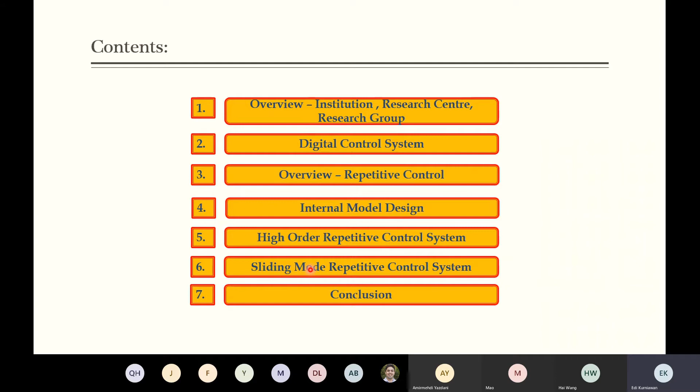My presentation material is composed of: first, a brief overview about my institution, research center and research group; then a short introduction about digital control systems, because most design is done in discrete time; then I'll explain repetitive control, and the internal model design; then I'll cover a certain type of repetitive control called high-order repetitive control systems; and number 6, I'll discuss how to integrate repetitive control and sliding mode control system to get better performance; and then I'll close with conclusions.

This is my institution, named Indonesian Institute of Science. The official name is actually LIPI, so it's not IIS, it's LIPI. And the headquarters is based in Jakarta.

This Indonesian Institute of Science has 25 research centers, 4 administrative bureaus, 4 botanical gardens, so we have botanical gardens as well, and there are almost 1,600 researchers. The 25 research centers are located in 11 provinces, so it's not all centralized in Jakarta, but spread across 11 provinces in Indonesia.

This Indonesian Institute of Science is the largest research institution in Indonesia, and it's also a government research institution. It was established in 1967, and it's also rooted from the colonial era in 1817 with the establishment of the Center for Plant Conservation, and we are a leading patent contributor in Indonesia. That's about the Indonesian Institute of Science.

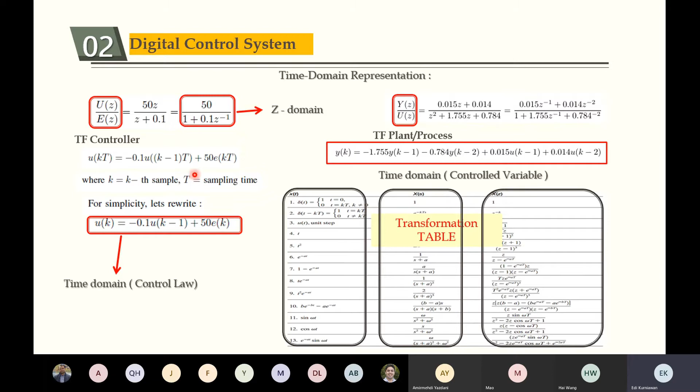Next, we go to repetitive control. I would like to introduce repetitive control. I think it's already well established since 1970.

Repetitive control is basically a learning control scheme, but this learning control scheme is different from a neural network or AI. This learning control system is based on using the previous value, one period value, and this RC is powerful for perfect reference tracking and also good disturbance rejection. The requirement is that the reference and disturbance has to be a periodic signal.

The application for RC can be used for robot control - for instance, for a pick and place robot doing repetitive tasks, picking and placing repetitively - and also used for hard drives in industrial machinery to remove vibrational disturbance.

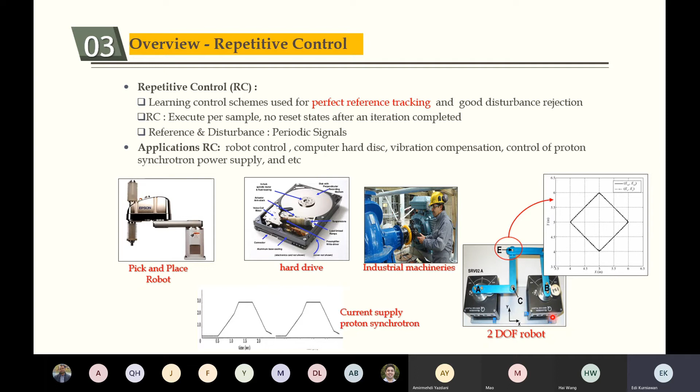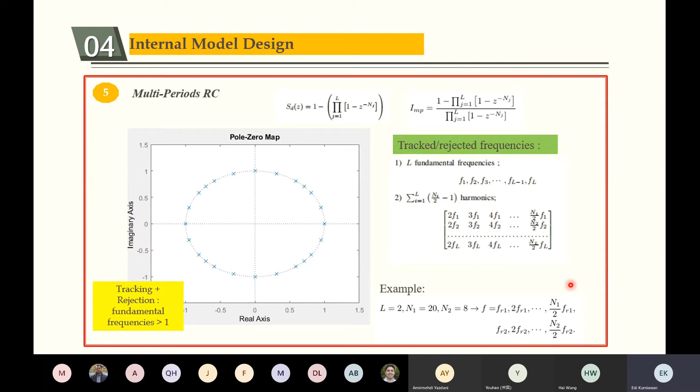Next is multi-period RC. So we are trying, let's say, tracking and rejection at the same time, but it has more than one fundamental frequency. For instance, I would like to track 1 Hz and also reject a disturbance at 1.5 Hz, then we need to use multi-period repetitive control. So here, for example, we have two fundamental frequencies, and we can reject the first fundamental frequency and its harmonics, and also reject the second fundamental frequency and its harmonics. That's for multi-period RC.

However, what if the period of the reference or disturbance is varying or changing? So it's not exactly what we knew before. Can the generic, modified, odd harmonics, low order, or multi-period RC handle that? The answer is no. When we have this kind of variation, the number of samples per period will vary as well. This variation affects the tracking accuracy significantly. And another problem is, what if the plant model, or the stabilized plant, is a non-minimum phase plant? Non-minimum phase plant means it has an unstable zero. When we do an inverse, it will be unstable. And the generic learning function, which is the inverse model, will result in an unstable controller.

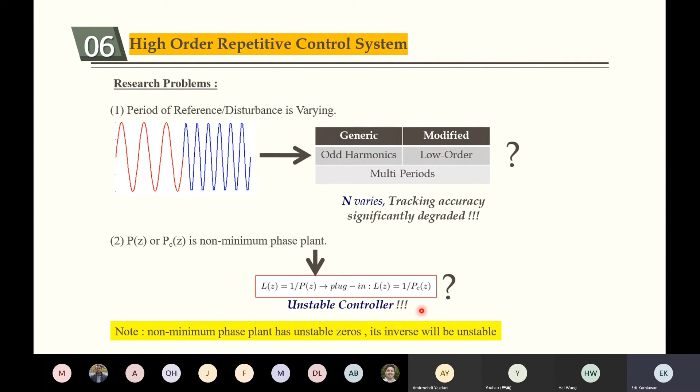How to compensate for that: for the first problem, about period variation, there are two approaches. The first approach is using a high order RC, and the second approach is using adaptive RC, but I'm not going to discuss adaptive RC here. I'm going to discuss high order RC. High order RC has fixed controller parameters, and I will show the configuration of this high order RC. For the second problem, what if the plant is non-minimum phase? The approach here is I'm proposing a new learning function design that has a stable and causal form.

So the design objective here is to explain how to design high order repetitive control to be robust against period variations, and also how to design the learning function L(z) to handle both minimum and non-minimum phase plants. This is the structure of the high order repetitive control system. The structure here is also in a plug-in manner. We have a plug-in, and a high order repetitive control as H(z), along with a conventional control C(z) and a plant P(z). This is the transfer function of the high order repetitive control. We still use this Q(z), or the low pass filter, but here we have a D(z), and D(z) is in this form, different from the previous structure.

Here is D(z). D(z) is the structure with many series of delays, and there are weights as well here, and the weight has to satisfy this condition.

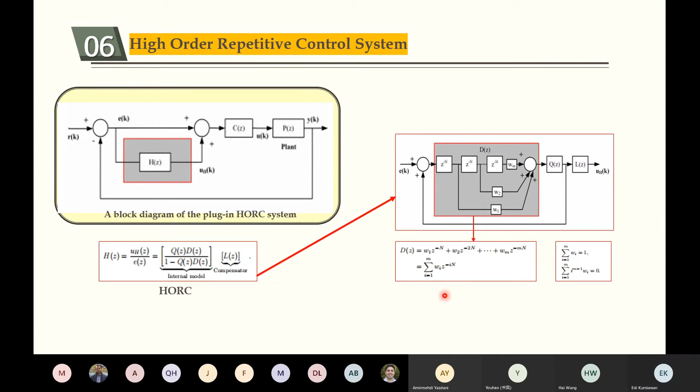This high order, we can also call high order internal model, can be a solution when there is a period variation.

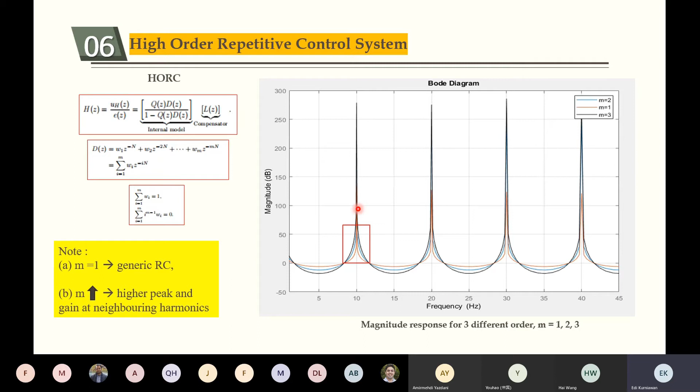How do we design this high order repetitive control? We need to get the characteristic equations and derive the HORC stability conditions. We have a stability condition here that is different from the previous generic RC.

With the stability condition, we know PSZ, the stabilized plant, and we know QZ, the low pass filter. We can determine that. We know the DZs, and we can also determine that.

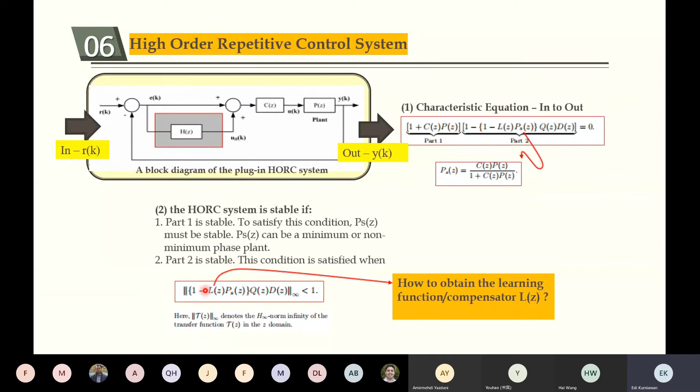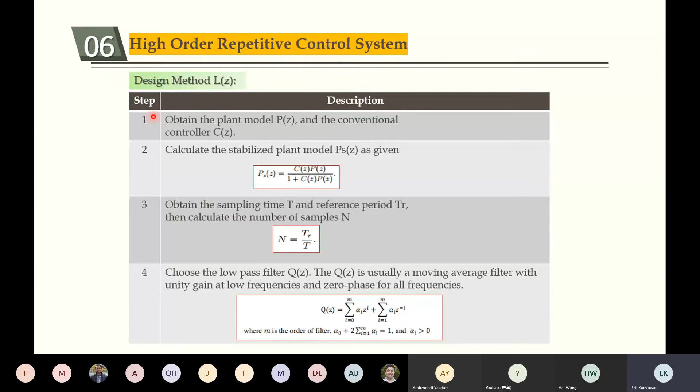How about LZ, the learning function? How do we obtain the learning function here? I propose a design method to obtain the learning function that works for both minimum and non-minimum phase plants, though I'm not going to go through the steps one by one. The idea is how to get the stable form of the learning function.

I'm using a stable form compensator here, and then using optimization to obtain the parameters B0, B1, BL, and A1, A2, and AL. The A1, A2, and AL become a constraint here. To make it stable, they have to be between -1 and 1, ensuring that the resulted learning function will be stable.

This is the simulation result for a non-minimum phase plant. We have this minimum phase plant, which is non-minimum because it has an unstable zero in the numerator. So if we use the inverse of the stabilized plant, it's going to be unstable. That's why I'm using the proposed method.

Using a second order LZ, I need to find parameters B0, B1, B2, A1 and A2, using the optimization MATLAB toolbox. I obtain these parameters and these learning functions. If we plot the magnitude response of this learning function and also the stabilized plant, the magnitude response of the learning function is actually inverse, also canceling.

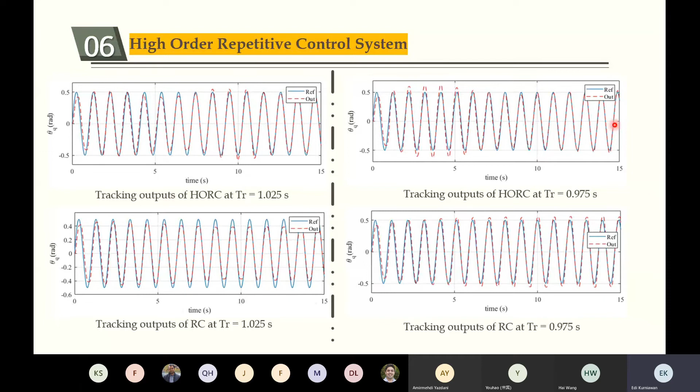So that's about the high order repetitive control systems. Next, I would like to describe how to integrate sliding mode and repetitive control, because those are two different, powerful control methods. But how do we integrate those two control methods, and what are we trying to achieve by integrating them?

For instance, we have a problem where we have a periodic disturbance with several fundamental frequencies, and we are trying to track a reference signal with several fundamental frequencies, while the plant is also subject to uncertainty, parameter variation, and so on. This case, where many fundamental frequencies can appear, occurs in electromechanical systems, hard drives, and power inverters.

That's why we need to try to combine sliding mode and repetitive control. The objective here is, first, to track the reference signal RK accurately and to cancel the effect of disturbance WK. We're also trying to achieve fast transient response and robustness against plant variation.

Fast transient response is an important issue, because like I mentioned before, if there is one period delay in RC, that makes the transient response pretty slow. For instance, here, even for the generic RC, there is about one period of slow transient response shown in the red line, because there is one period delay here.

So what's the solution? What approach can be used? I'm proposing what I call multi-period sliding mode repetitive control. It actually combines the features of multi-period RC and sliding mode control.

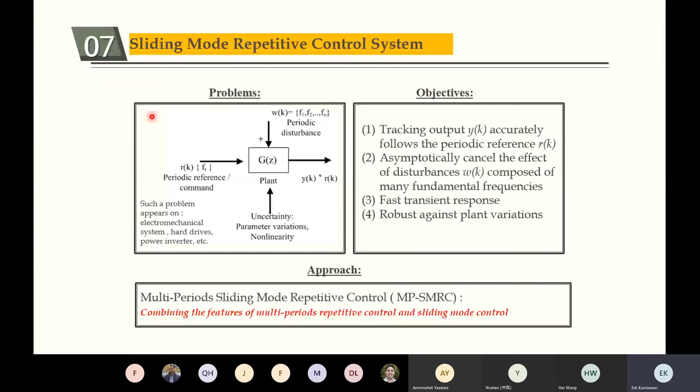The design is in a discrete time approach. I think we know before about sliding mode control - it's a nonlinear control based on a switching function. It can provide a fast response and is robust to model uncertainty and disturbance. So now we have SMC, which is a nonlinear control, while RC before is linear, and we need to figure out how to combine them. SMC is also a well-established control method that has been used in many applications.

In this case, I'm using a discrete time approach to design the SMC - I mean SMC without the RC. The design steps are: first, we need to determine the sliding function SK such that the sliding mode, the switching plane where SK equals 0, is stable. Then, because the design is in discrete time, the second step is to determine the reaching law. The reaching law is the difference between SK and SK minus 1, which directly dictates the dynamics of the sliding function. After that, we synthesize the sliding mode control law based on the reaching law and the nominal model of the plant.

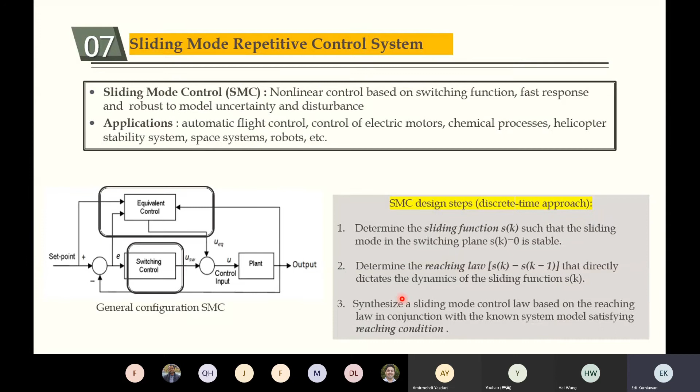How do we design and combine RC and sliding mode control? Is it just adding RC with SMC? Can it work? I don't think so. There is a design step to do that.

The next question is which stability condition is used. For RC we use a stability condition in the frequency domain, since it's linear control, while SMC is nonlinear control. We can use this frequency domain approach, and in SMC we use time domain reaching conditions. So which stability condition is used? I'm going to explain in the next slides.

For instance, consider this linear time invariant model with output disturbance. I'm considering a single input, single output model with output disturbance, and this output disturbance may have several fundamental frequencies. BZ and AZ are the numerator and denominator, and D is the known delay steps.

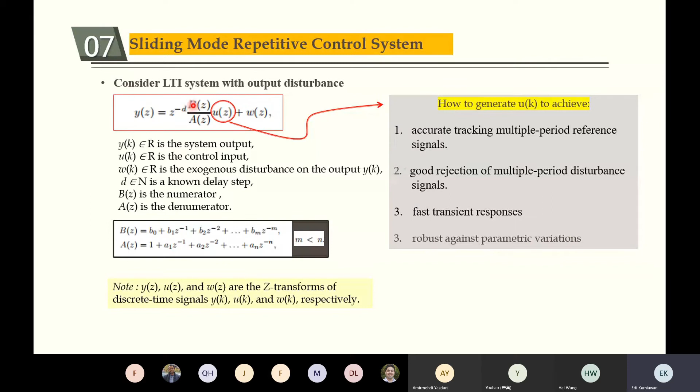The question is how to generate UK or UZ here to achieve accurate tracking of a multiple periods reference signal, also doing good rejection of multiple period disturbance, provide fast transient response, and be robust against parametric variation, for instance in the numerator or denominator parts.

Here are the design steps to combine sliding mode and repetitive control. First, we need to formulate the tracking error dynamics, which is the difference between the reference and the tracking output.

After that, we substitute this YK with the plant model, and then we have this error dynamics. We are going to use this error dynamics in the next steps.

I think the key important thing here is to determine the sliding function and reaching law. There are many choices about how to choose the sliding function and reaching law. In this case I'm using a linear sliding function, picking polynomial CZ as a Hurwitz polynomial, or stable polynomial.

And the reaching law here, I'm using a generic reaching law with a smoothing function SFK, and here the smoothing function uses saturation functions.

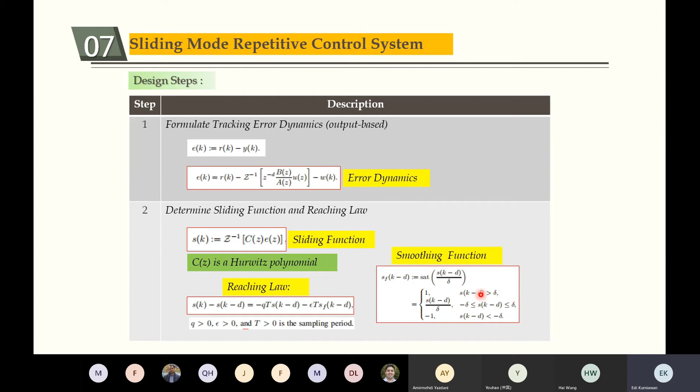Then we need to pick, or choose, the internal model of RC. The internal model of RC that we are going to use is multi-period RC. From my explanation before, this is model number 5. We are going to use this model, and we are interested only in the denominator of RC here. We are going to use this part.

We are using this denominator part. Then we can represent this denominator of RC model as IMZ, which is equal to 1 minus EZ, and EZ is represented in this equation.

After that we synthesize the multi-period sliding mode repetitive control. There is a step-by-step process to synthesize that, but I'll skip it for simplicity.

So we end up with this kind of multi-period sliding mode repetitive control law, where we find a new transfer function MZ, which is the polynomial CZ multiplied by numerator BZ divided by denominator AZ.

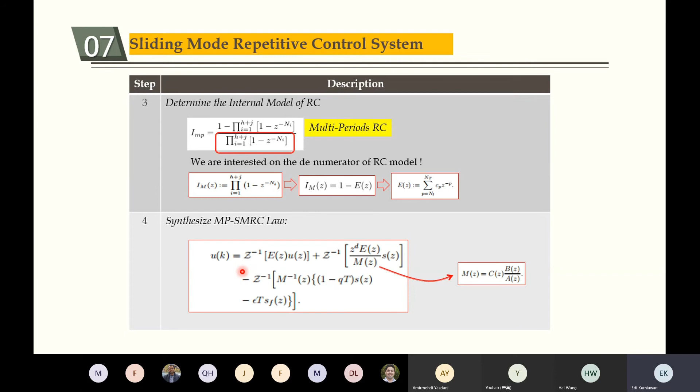From that control law, we can plot the configuration of sliding mode repetitive control. So we have this structure.

We have the tracking error here, and then the transfer function CZ, and then we have the sliding function here. The top part is actually RC, and the bottom part is SMC. The question is whether the control law is implementable, because there are some questions here.

For instance, we have Z to the power of D, which is positive. Is it implementable because it's non-causal?

Also, is the inverse of M stable or not? There are two important remarks here: the term EZ indicates multiple delays with different lengths arranged in parallel, and the non-causal term Z to the power of D is applicable because it's multiplied by EZ.

And the inverse of MZ is also stable, because we use an LTI system with a minimum phase system, which means its inverse is also stable. But for non-minimum phase systems, we are going to have different design methods. We can use this one.

Now for stability analysis: now it's become nonlinear control, because combining RC and SMC results in a nonlinear control. That's why we use the stability of SMC. We use this reaching condition to check whether the proposed control law guarantees stability or not. But I'm not going to show the stability proving here.

Let's see the simulation result for this case. Let's say we have a model of a Quanser servo here with the output disturbance.

This is the discrete model, and then I pick the sliding polynomial CZ, and choose some parameter for the SMC here, and then EZ is in this form, and we have the transfer function of inverse of MZ like this. Then finally we can construct the control law of sliding mode repetitive control here.

In this case, we are going to track a periodic sinusoidal reference signal, and also reject a disturbance which has two fundamental frequencies, so two fundamental periods. Period 1 is 0.8 seconds, and period 2 is 1 second. That's why we have two fundamental frequencies. We need to calculate the number of samples for period 1 and also for period 2 - we have 160 and also 200. So this is the disturbance that we are going to cancel.

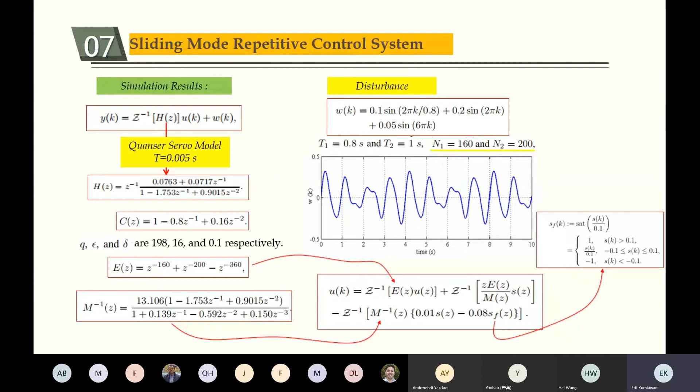What if we try varying the plant parameters? For instance, we change it by 2.5%. For sliding mode repetitive control, the tracking error - compared to the previous one without plant variations - shows the transient response is slower, however it's still stable. While RC also shows the transient response is slower and still stable, but the peak is larger compared to sliding mode.

What if we increase to 5%? We see that for sliding mode repetitive control, the tracking error shows the transient response getting slower compared to the 2.5% variation, but it's still stable. While RC gets slower but also becomes unstable - it's diverged, it's gone unstable. But this can be understood, because RC is marginally stable, having a pole exactly at the unit circle, which means it's easily destabilized if there are plant variations.

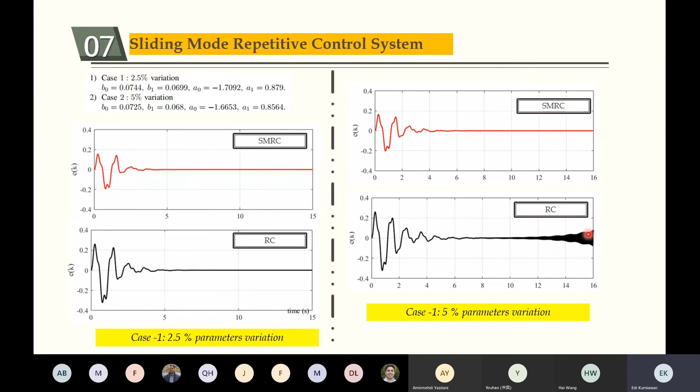I think that's for SMRC. Now I'd like to close with the conclusion. There are two key designs of repetitive control. The first: we need to design the internal model - we need to choose which internal model suits our preference, for instance what kind of signal we would like to track, what kind of signal we would like to reject, and the frequency components in this signal. The second key design is we need to design the learning function or compensator. The learning function is part of RC that can stabilize the whole RC system.

There are now 6 internal model types. The first one is general RC, modified RC, harmonic RC, low order RC, multiperiod RC, and the last one is high order RC.

RC itself has primary drawbacks: it's sensitive to period variations, has slow transient response, and is not robust against plant uncertainty. However, high order RC can be used to compensate for slight period variation. If there's an extreme change in period variation, high order RC cannot handle that. So high order RC can compensate for slight period variation, and the learning function is designed based on optimization used to stabilize both minimum and non-minimum phase systems.

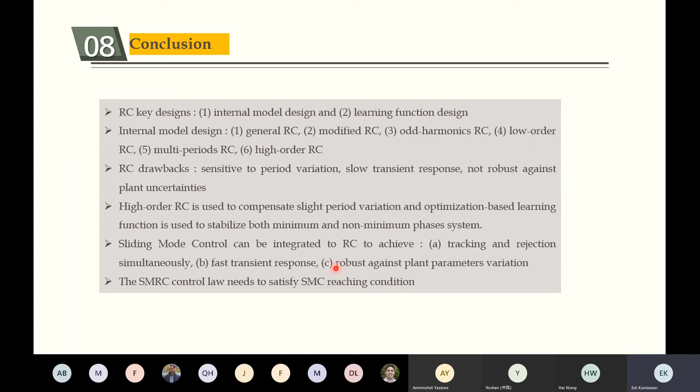I think that's all for my presentation. Please, welcome any feedback or comments.

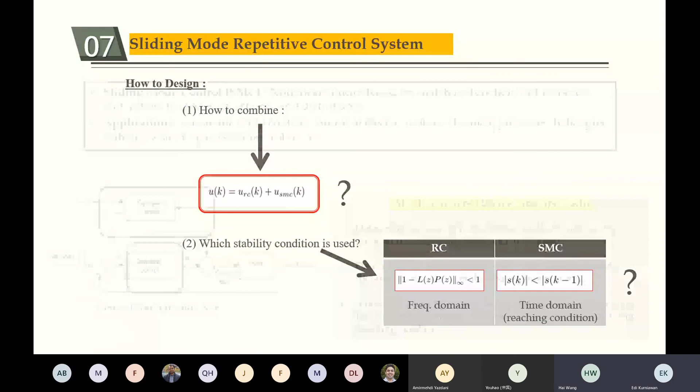Thank you very much for giving us the excellent presentation regarding sliding modes and repetitive control systems. I've done almost 10 years of research on sliding mode control theory and applications. By combining sliding mode control theory and repetitive control methodology together, this would be a very useful technique for industrial applications. The combination can definitely provide accurate tracking performance, good disturbance rejection capability, fast transient response, and robustness against parametric uncertainties and disturbances. I believe this could be a very good candidate for industrial and mechatronic applications.

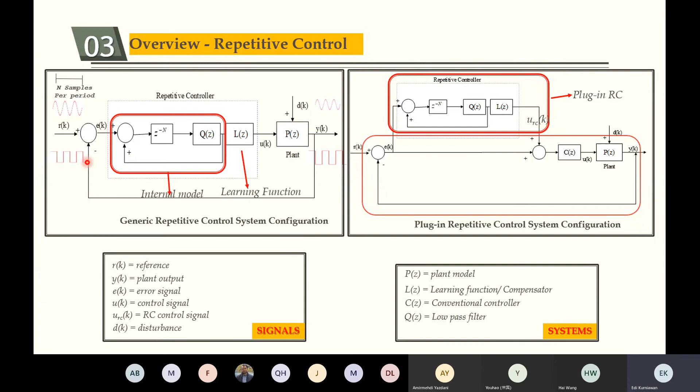That's why we try to combine RC and SMC. In this case, SMC is trying to provide fast transient response and robustness, because RC here is marginally stable, meaning it's easy to go unstable, especially when there is a change in the plant or plant variations.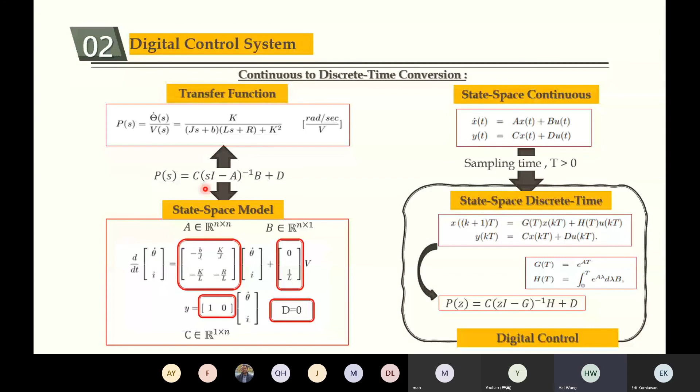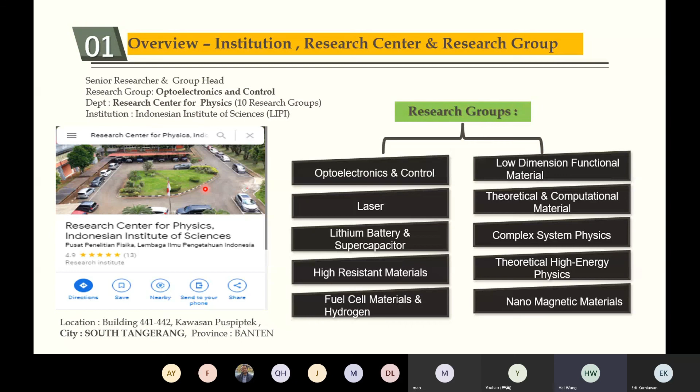Eddie, I have one question. Because now you are using slightly more repetitive control for applications, do you have any idea about the change of the sampling frequency in your control methods, and is there any effect on the application?

Yeah, for different applications, even the sampling time. Yes, the sampling time, because sometimes for practical applications the sampling period is not that small. It depends on the bandwidth of the whole closed loop system.

So in this case, does it affect the closed loop control performance of your system? Yeah, this sampling time, how to choose the sampling time is tricky as well. That's why in my case I'm not going into depth about the sampling time, but I'm trying to pick it as small as possible.

Because I think the issue about sampling time is quite tricky for the SMC, because it can affect other things like chattering etc. I'm also carefully tuning some SMC parameters. There are no exact rules about how to choose, but you have to be careful. That's all I can say about choosing the sampling time. Different applications might need different sampling times - small sampling time doesn't guarantee good results.

Because sometimes if you change the sampling time, the whole control performance should be affected. So in this case, we have to very carefully select the sampling time.

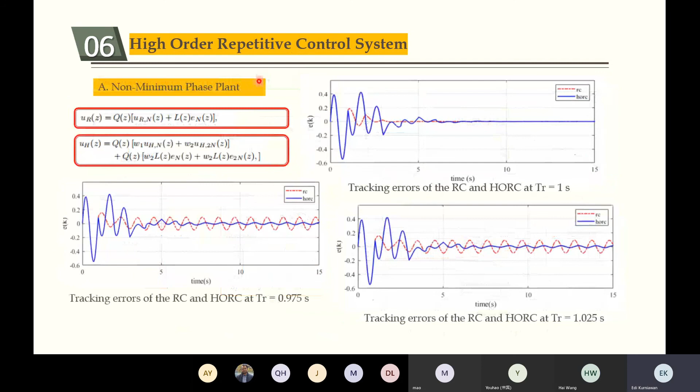Yeah, I didn't mention the sampling time is about 0.005 seconds. Yes, I've seen that. Yeah, okay, all right. Thank you, Eddie.

So, any more questions from our audience? Hi Eddie, hi, my name is Stone, and I'm from Melbourne Uni. I've just graduated from the Department of Mechanical Engineering. I'm quite interested in the topics of control theories and applications, and thanks for your speech today. I've just seen your model, is it the Quanser servo model, like a vertical bar or something?

Because I have used the Quanser Aero model for LQR control applications. For this question, I think you could just use some control effort consideration. Sometimes it's just saturated, so you won't get the performance you desired. Also, for the question raised, because the model is linear, the sampling time - you're trying to seek the maximum sampling time, because sometimes it takes some control effort to do that, since you're using a discrete time model, right?

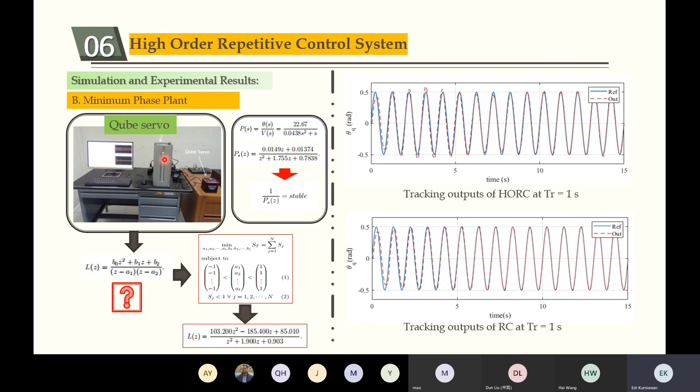Also, the control effort is an issue here because there is a limitation on the control signal that needs to be generated. That's why sometimes the control effort is too high, and it deteriorates the performance. In this case, that's why the use of a filter is quite important here, and the Q filter is helping to suppress the control signal, because if the control signal is too high, it will be saturated.

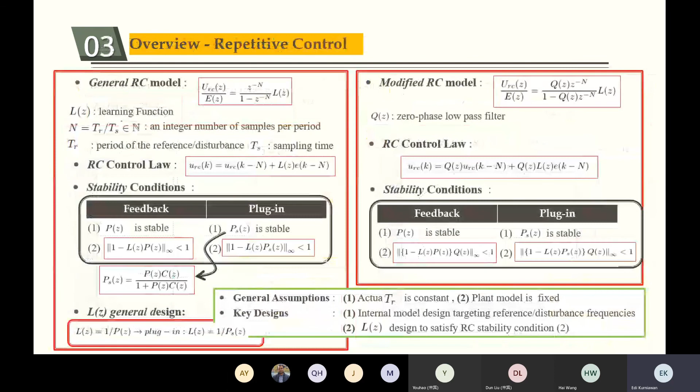But by using this Q filter here, because RC is pretty sensitive to any change, a small change will trigger a high control effort. By using the low pass Q filter, it helps RC generate a smaller control effort, but the performance is still good. The tracking accuracy, especially at high frequency, is degraded, but sometimes we don't need the high frequency component.

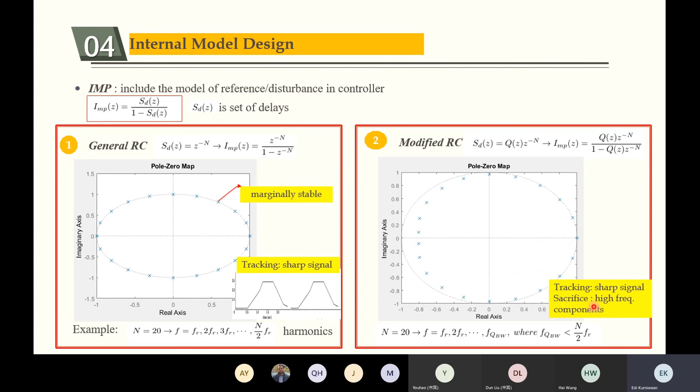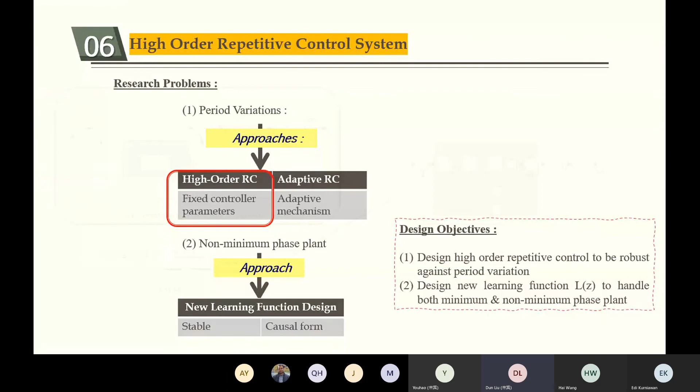Yeah, I think that can answer your question. I just saw your AD conversion, so I think you can try tustin instead of the hold, because I've tried some experiments on the Quanser Aero model, and tustin gives better results. I'm not trying one by one - I just use the default conversion method they provide.

Also, you can use something like a parallel iterative learning architecture to improve your performance, I think, because you're using something like compensation to compensate the plant model. So I think sometimes you can use more adaptive control laws. I don't have that much question, but I just had some thoughts on your project.

Okay, nice - tustin, yeah. Do you mean iterative learning control, ILC? I heard about that - ILC is another control method that has almost similar performance to RC, because I saw the architecture is quite similar.